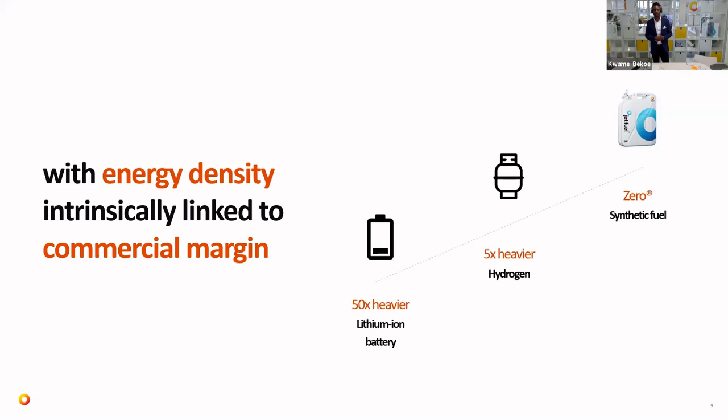One of the reasons why we believe synthetic fuels is the answer is because, number one, it's 100% fossil free. As I mentioned, these fuels are made simply from air and water, from hydrogen and carbon dioxide. So you've got unlimited scale - you essentially have free and abundant feedstock available, unlike biofuels, which are limited to the amount of land and water resource.

What is very key is energy independence. We say this because at the moment, if you look at geopolitics, we have about 22 countries producing about 90% of the world's energy in the form of liquid fuels or fossil fuels. When it comes to the key feedstock of this synthetic fuel, which is renewable power, every country has some form of renewable power, be it wind, solar, hydro, or geothermal. We believe that moving forward, this can actually be a form of energy independence for nations.

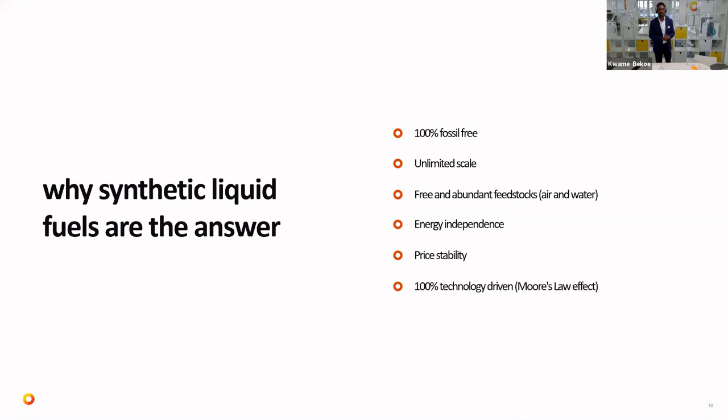This is an industrial process. We're essentially taking something that happens in nature, photosynthesis, and putting it in a factory by absorbing carbon dioxide using, for example, renewable energy like solar, air, and water, to produce a fuel. So essentially, it's an industrial process which you can optimize and continue to bring down the cost. I think one of the key arguments against the fuel we produce is the high cost of energy that it requires, but this is something we believe is coming down dramatically. If you go on to the next slide, I can demonstrate how we believe the future is going to look, because for us, this really is a Tesla moment in the synthetic fuel industry.

At the moment, the market is about $0.1 trillion biofuels, but that's going to hit a limitation once you're limited in the amount of land and water that can be used to produce these fuels. But we believe that as the price begins to scale back, in the next 25 to 27 years, synthetic fuels could be almost half of the fossil fuel market, which is a $5 trillion market.

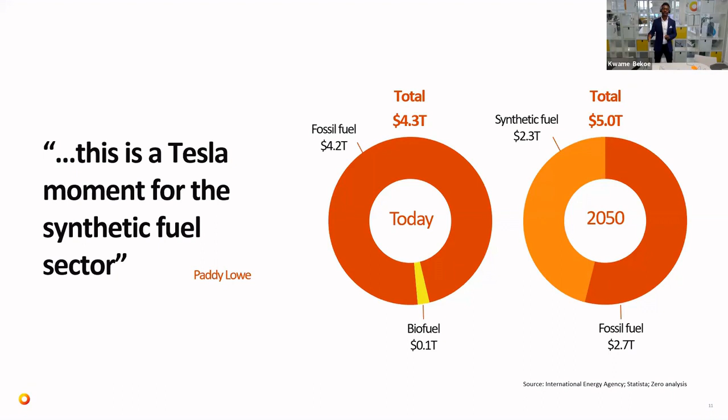On the next slide, we demonstrate how this price can come down significantly with time. That's primarily due to the reduction in renewable energy costs, the coming down of the cost of electrolyzers, which go into the production of green hydrogen, and the integration of all these products that make for a more efficient system.

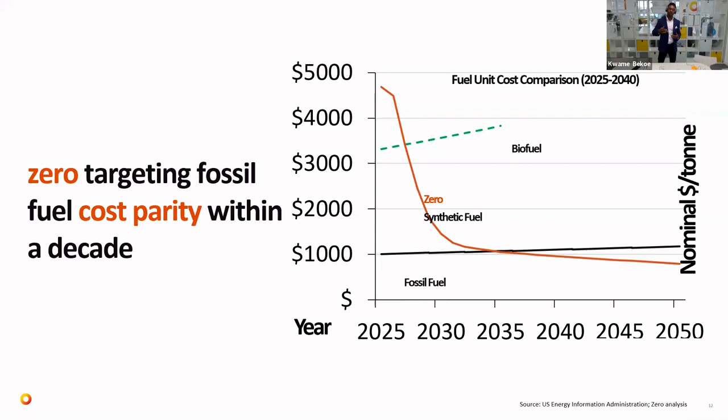So now, if we go on to the next slide, I'd like to talk a bit about the team, the company, and what makes Zero Petroleum and what drives us.

Going on to the next slide, I think one of the things that is really fundamental is the team. We're a startup founded by Paddy Lowe, who many of you interested in Formula One may know as a very popular British engineer, the former technical director for Mercedes, McLaren, and Williams Group. In fact, a quarter of our team come from the Formula One industry.

This drives the culture and the way we're tackling this problem, which is very much on a simulation basis, really modeling every part of the plant in terms of the production of the fuel and tracking all those metrics to further optimize production. Because one of the things we believe is that the winners in this field are those who can produce the most amount of fuel for a given amount of energy.

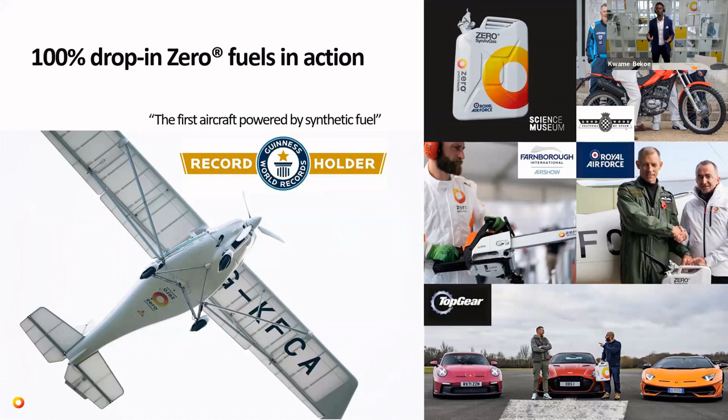So if we go on to the next slide, we'll highlight some of our achievements. In 2021, we were the first to test this fuel in an aircraft, receiving a Guinness World Record. We've gone on from there to test it in luxury cars, chainsaws, small jet engines, and motorbikes. Essentially what we're trying to demonstrate is a drop-in solution that requires no modification to the engines or the assets it's powering.

Now, on the next slide, I'll touch on the crucial element, which is how we actually produce the fuel. As I mentioned, air and water come in. We capture the carbon using a process called direct air carbon capture. This process is maturing quite dramatically. At the moment, we're also supplementing the carbon dioxide with biogenic sources of carbon dioxide.

On the green hydrogen side, we use electrolysis to produce the hydrogen elements. The hydrogen and the carbon dioxide together form a syngas, which goes into our version of Fischer-Tropsch, essentially a catalytic process that produces different types of hydrocarbons. So we've got gasoline, jet fuel, and on the heavy ends, diesel. One key thing to take away from this slide is that the production of the hydrogen, the energy molecule, consumes about 95% of the energy of this process.

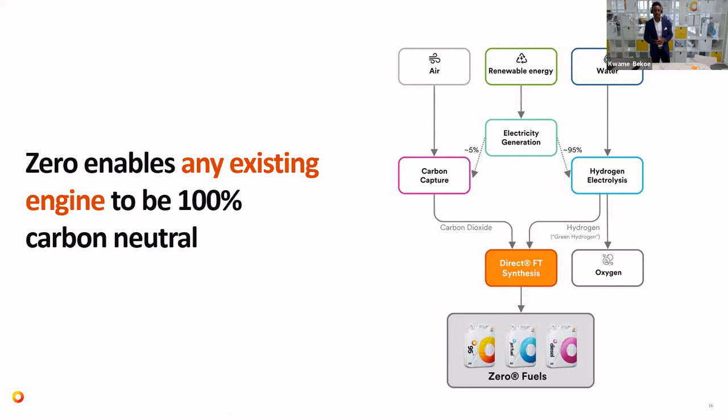So we can go on to the next slide, just a couple more to go. As I mentioned, these are drop-in fuels which go directly into the assets and internal combustion engines. The gasoline has the high octane levels required for the engines, and the jet fuel also has the aromatics necessary for all the elastomers in the engine. So it's a true drop-in fuel that requires no blend with fossil-based fuels.

On the next slide, please.

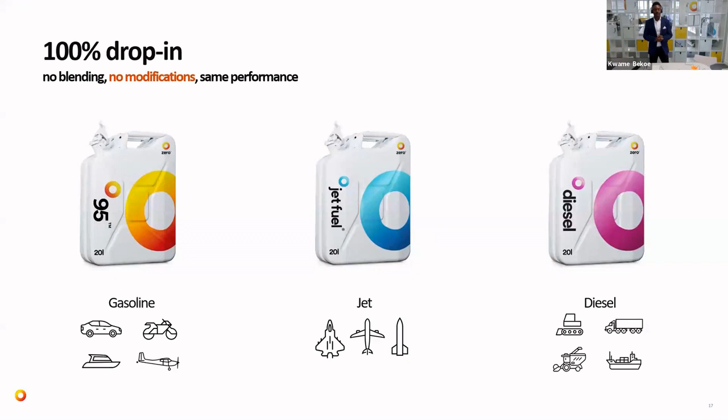What I'd like to do is just show a couple minutes video to highlight some of the achievements of the company. So thank you very much. Thanks.

Thank you, Kwame. We have a couple of questions you may want to take. The first one is coming from me. What is the time to market? I noticed you've suggested that by 2050, 50% of the market will be synthetic fuels. But when could we actually start seeing this? Or how quickly can we start seeing this being delivered to the average person?

Thank you for the question. So essentially, we are looking to go to commercialization in the next 2 years, and it's going to be a gradual scale-up process, as you can imagine. It's something we've tested and demonstrated over the past few months and years. We've signed strategic partnerships with a couple of airlines and OEMs in the aviation space, but also in the automotive space. Right now, we're working towards certification of the fuel, working to get a consistent mix. And then from there, it's really commercialization from 2024, 2025.

Thank you so much. We've got a number of questions coming in from the webinar attendees. I'm going to start off with one from Thomas Lancaster, and I'll try to read it verbatim. Is it not misleading for combustion alternatives to compare against hydrogen and batteries based just on energy density? Efficiency of energy use via an electric powertrain versus ICE is also a key factor.

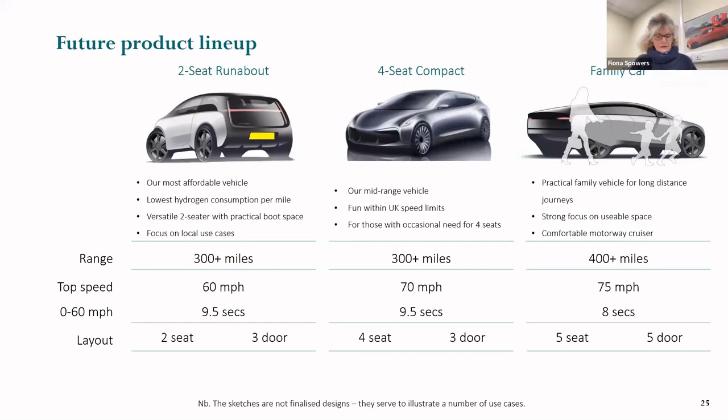Now, you may be asking, because this is what the government says all the time, and everybody you hear about hydrogen, they say hydrogen's just for the big stuff, and batteries will cope with all the small stuff, so we don't need anything but batteries for passenger vehicles. Well, I can tell you we do an immense amount of talking to the general public, and the number of people who come up to us and say, I'm just waiting for one of your cars, because batteries are not going to do it for me, is incredible. So we have a long waiting list of people interested in this.

But I wanted to make a technical point, which is that it's not a question of size. It really isn't. You could have a battery truck, no problem, if you only needed to do 50 miles a day, and you could refuel or recharge it overnight. It's not a question of size. It's a question of range, uptime, utilization, regular or not regular duty cycles, and refueling.

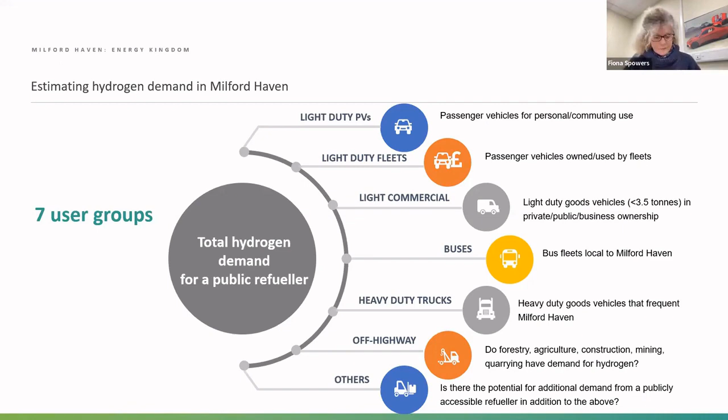Just to let you know, Milford Haven has a population of about 14,700, and we did a street-by-street analysis of the housing stock. In Milford Haven, the availability of off-street parking was there for 63% of all the housing stock, but 37% had no off-street parking, which we are taking as a proxy for difficulty charging. It's very difficult to charge your battery car overnight if you don't have off-street parking. In fact, the UK average is 39% of the housing stock will never have access to overnight charging. I can envisage if the only zero emission option is a battery electric car, you will have fights for the lamppost on your street if you live on a terrace, in a street of terraced houses. So we took half of that, 19%, as the percentage that might need a hydrogen version of a zero emission car to work out the full scale demand.

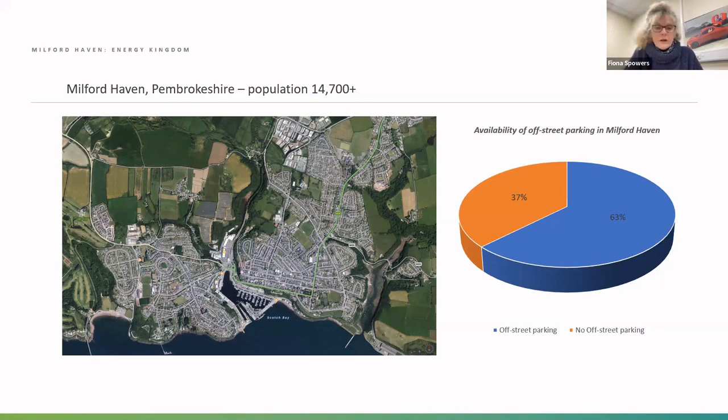On the basis - and this is really the Milford Haven case - going bus by bus, how many cars enter the town on a daily basis, how many are in light vehicles, light duty fleets, what we got in emergency services vehicles like ambulances, etc. We worked out, as you can see, there are kilos for each of those. What's interesting is that when you look at it, 580 kilos altogether for passenger vehicles, it more than equates the heavy duty trucks at 450.

So you end up with quite a heavy demand of roughly 1.7 tons, that's 1,770 kilos a day of hydrogen needed.

Now you're going to ask, where is this hydrogen coming from? At the moment it's largely grey hydrogen, just as battery electric cars, if charging from the grid, aren't charging from green electricity only.

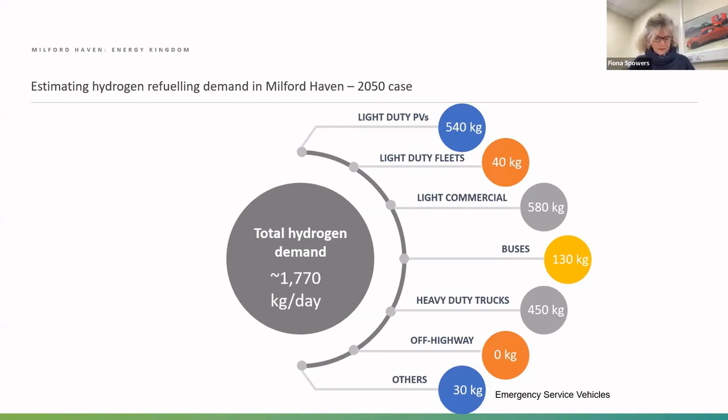I want to show you the next slide, please. That hydrogen infrastructure, which is really thin on the ground, by the way, isn't the end of the world.

There are all sorts of transient options. So the big picture on the right, the Motive Fuels Tyseley site, is the state of the art, offering 1,200 kilos a day, and it's fueling buses. It's a big commitment in Birmingham.

But next to it is a sort of small container-based solution, with the hydrogen transported to site, offering 450 kilos a day. So there are transient things.

And then next to that, this Octopus refueler, which is delivered by NanoSun, is a container that's just shipped in, filled up, and then replaced. So that can sit in the corner of a car park with no trouble.

So in terms of transition, there are examples out there, but ultimately I think we want to see hydrogen on a pump in a forecourt.

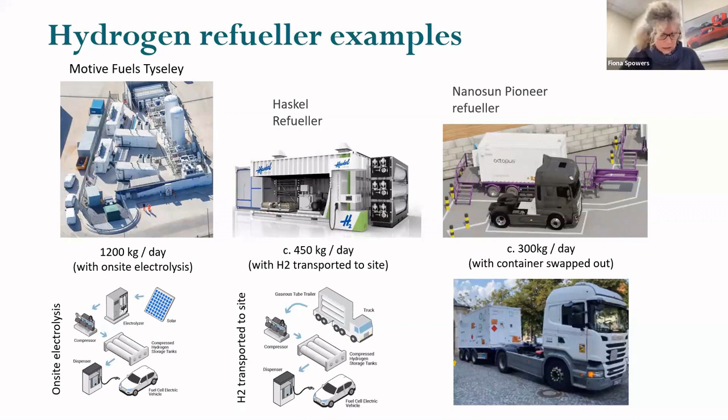And last slide, please. We see the local authorities as the key enablers to this transition. So we talked to a great many of them, and we are in dialogue with authorities who are already running battery electric vehicles in their fleets, but they're looking for alternatives for other use cases, the ones that battery electric vehicles can't meet satisfactorily.

So constant uptime, range. Monmouthshire County Council has a catchment of 270 square miles, and that is a lot to look after, and they need alternatives for some of the local authority needs. They also have declared climate emergencies, and they're taking that very seriously.

And they have a duty of care to enable the community at large to decarbonise. And I know this is fraught with anxiety for councils. They really care a lot about it and are trying to do the right thing.

But they're in a position, in our view, to encourage infrastructure development, though they're not required in this case to subsidise it. The companies are out there waiting to come in and put the refuelers in. If planning permission and other things can be helped or encouraged, I think it will make a huge difference.

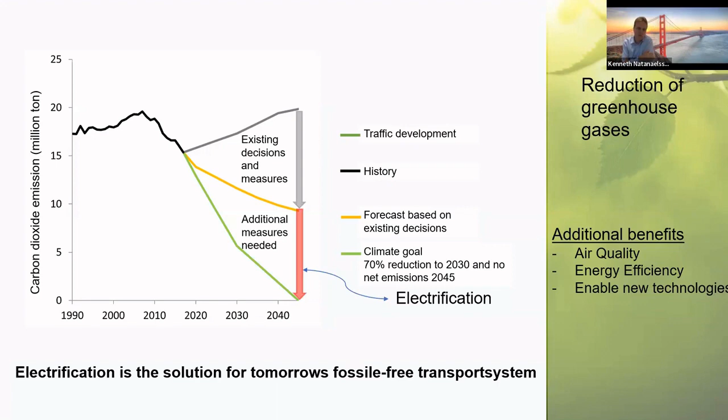Our goals at 2045, that is zero emission. We see that that's actually where the electrification of the road transport system will have the most impact. So we see a need to electrify the transports is really high, that's why we are working with it. Next slide, please.

You have listened to two great speakers here that have golden solutions for this, but we as a road administration think we will probably need a lot of tools to actually get to these goals. If we are going to reduce our carbon footprint to zero with the domestic transport system, we need to use a palette of activities. For example, we have to increase the efficiency in the transport system - we are working with longer and heavier transports.

We are working with biofuels, and of course with static charging and also dynamic charging, that is electrical roads, and hydrogen and other solutions. We are also looking at battery swapping and vehicle to grid, and how we can use all these kinds of tools to actually become carbon free. Next slide, please.

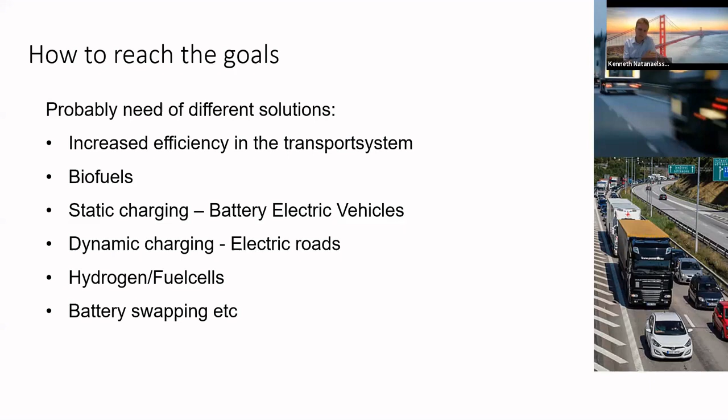Our strategy is that we see static charging will be the backbone within our system. So we have to work with that, and also with hydrogen, especially for heavy transport. We see, for example, the new AFIR directive in Europe that we will implement, because it's a directive, so we have to do it.

We are also looking at ERS, electrical road systems, but we are currently looking into it - how will this be a potential solution? We are doing some activities there, so during the next year we will know more about this.

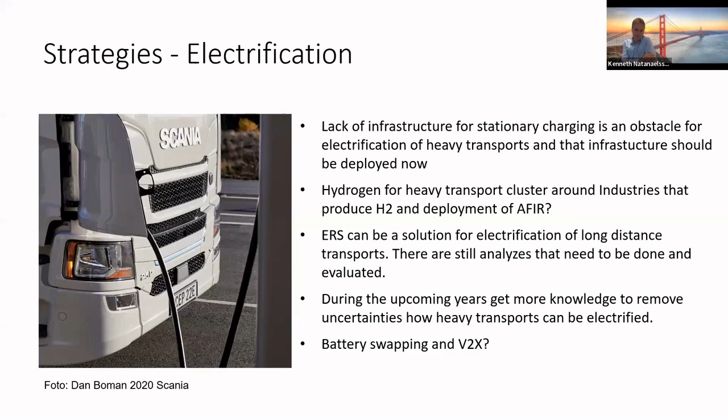So electrical road system, what is it? It contains different things, but you can divide them into four parts. First, you have the main electrical grid - for example, in Sweden we don't have so many local grids, but a kind of central grid. We also have to build a grid along the road that distributes the power to the vehicles, and that's the transformation part, which is actually what the electrical road does. We have different techniques for that.

Then we also have to integrate it within the road infrastructure. For example, if you have some techniques, you also have to have road barriers for traffic safety, and you might have to have monitoring systems, traffic management systems, and so on. So you have to work with the road infrastructure too.

In Sweden, we have actually demonstrated 4 solutions on public roads. We started with the conductive system in Sandviken - that is the catenary system above, where you take the power from above, like a rail system almost. We ran that for 4 years, between 2016 and 2020.

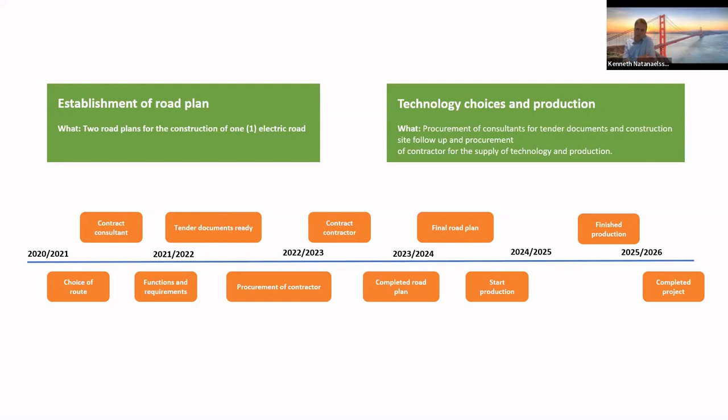We had a technically neutral procurement process that we launched about a year ago, but we've actually stopped it right now. We will go back and look into what kind of requirements we put in place, because the cost was too high for this system, and we didn't have the funding to go on with it.

So what are we doing right now? The current major activities at Swedish Transport Administration regarding electrification: we're working with a program for deployment of charging and hydrogen infrastructure. Together with another authority, we'll deliver an assignment to the government within approximately a month. As mentioned, with the permanent pilot, we're analyzing how to build it more cost-effectively, which will take a while. We're also working on a suggestion for a deployment plan for ERS, describing the consequences, costs and benefits, so the government gets documents to make a decision. We continuously follow up on electrification in society and the transport system to see what more we need to do to become more effective.

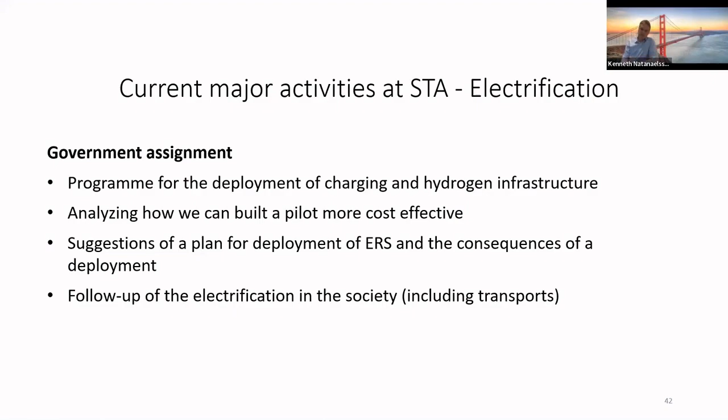I'll stop there, I think we're on schedule. Thank you, Kenneth, really very interesting.

A couple of questions. First from me: what vehicles are able to utilize these ERS systems in your trials? Do you have manufacturing agreements to put vehicles on these trials, or how do you accommodate it? No, actually we are buying knowledge from the providers of these different kinds of systems, so they are putting the vehicles on the test road, so to speak.

It has mostly been trucks and buses, but I know there are some light vehicles also. So is it fair to say that most of the pilots you're doing at the moment are more specific to freight movement than passenger cars? Our first challenges were for heavy trucks, so yes it has been that focus, but we don't see that it's necessarily just heavy trucks in the future. Of course it depends on the technique - for example, a catenary system is not so suitable for light vehicles. No, absolutely, that's a good point.

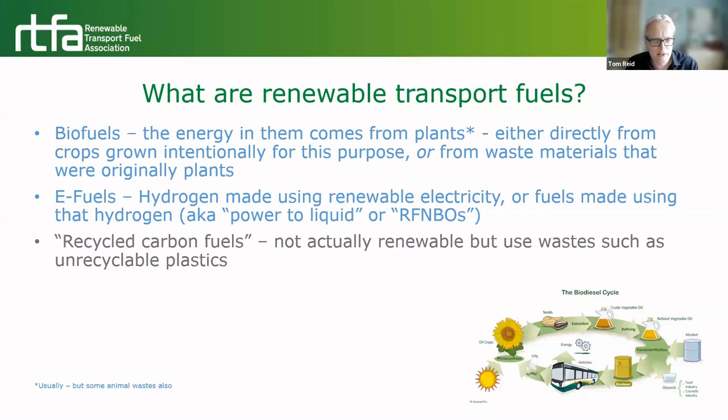Rather it's municipal solid waste, which is a mixture of waste plastic and food waste and cardboard and so on. So it's where you have a mixed waste that's difficult to treat. You could potentially turn all of that waste into renewable fuels. So the food waste, cardboard fraction would be a biofuel, and the bit from the waste plastics would be a recycled carbon fuel. So if we move on to the next slide, please.

I think the thing to bear in mind is that they do deliver significant carbon savings. Not 100%, but getting there. The other good thing about them is that they can be mostly used in existing vehicles. There's a lot of discussion about what future technologies will be along, and I personally believe they will be, and we'll have the choice to buy hydrogen or electric or other forms of vehicle in the future. But if you're trying to buy an electric 44-ton lorry at the moment, your choices are quite limited, whereas you could run a 44-tonner on renewable fuels right now. In a minute, I'll come on to a couple of people who are already doing that.

Something you may or may not know is that the biofuels particularly are already out there, already being produced, already being consumed. When you fill up at a petrol station, if you buy diesel, you'll see it says B7 on the pump handle. That means it has up to 7% biodiesel in it. Similarly, petrol has up to 10% ethanol, which is why it's labelled E10.

All this has been created by legislation by the UK government. It's something called the Renewable Transport Fuels Obligation Order, the RTFO. And that requires the big petrol and diesel suppliers to supply a portion of their product from renewables.

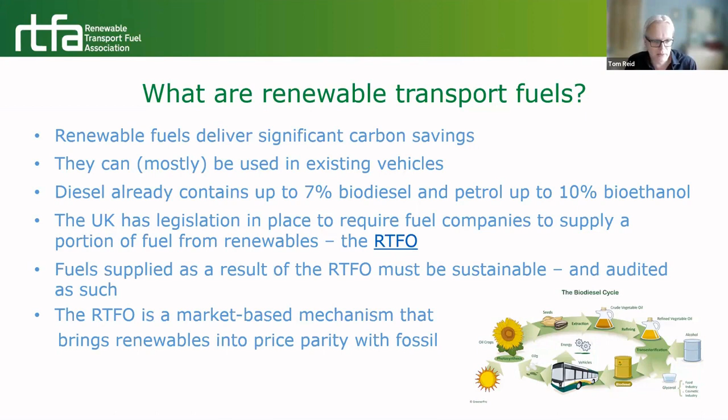The more or less is added there because it's a market-based mechanism, prices go up and down. So certain renewable fuels at certain times have been in price parity with fossil. It depends which renewable fuels you're buying and when you're buying them, because it does fluctuate. So if we move to the next slide, please.

So again, still dwelling on the credentials of these fuels. Greenhouse gas savings are measured using something called life cycle analysis, which is essentially a comparative tool. We know the carbon emissions from burning fossil diesel are 94 grams of CO2 equivalent per megajoule. The GHG performance of any renewable fuel supplied in the UK has to be measured against that, and then it's given as a carbon intensity or a percent saving.

This does take into account growing and harvesting of the crop, if it is crop-based, collection and processing of raw materials, conversion into fuels, and onward distribution. So all of the energy used, whether moving materials around or the conversion processes at the factory, all of that has to be taken into account.

And I would argue, given that this is something I've done for a living, calculating life cycle analysis of almost any product, you'd be very lucky to ever have something that was 100% carbon neutral, unless the entire supply chain was also carbon neutral, and more than likely you'd need some form of carbon sequestration alongside, because there are always going to be some fugitive emissions somewhere along the supply chain, somebody using a diesel lorry or ordinary electricity for their processing.

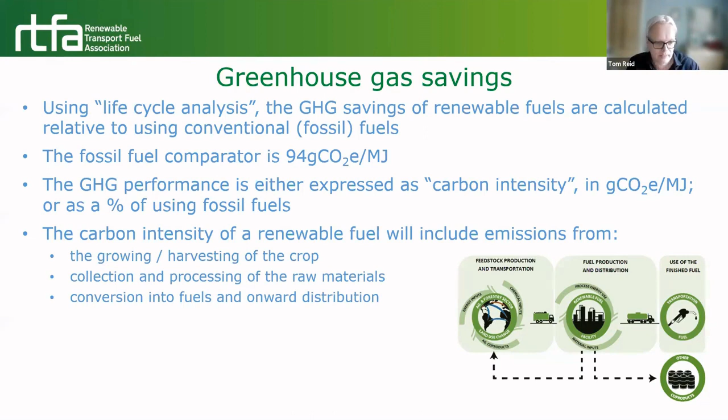Fossil fuels have been used for a good reason. They are comparatively cheap and abundant compared to all the other alternatives. They're easy to use, easy to distribute. If there were other, better, easier solutions than fossil fuels, we'd have started using them ages ago. They're there, and they've become essential for our way of life. I'm not particularly defending fossil fuels - I'd quite like to see the back of them - but nevertheless, the reason we use them is they are so convenient.

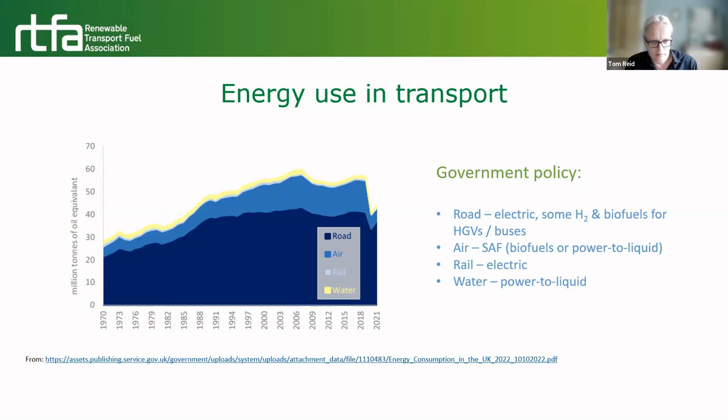If we move to the next slide please. So what I'm trying to say really is that renewable fuels are the near future. It's very interesting hearing the other speakers today - I think we will see all of those things come along in due course. But if you want to decarbonise today, and there's no better time to do it, your options are much more limited, which is where renewable fuels come in - you can deliver real carbon savings measured by the things I've mentioned previously.

Renewable methane is chemically identical to natural gas, but it's made largely at anaerobic digesters, which take in materials such as sewage, food waste, or farm waste like manure, essentially putrefying that material to produce a mixture of methane and carbon dioxide. The methane is separated and put into the national gas grid, and then you can take an equivalent amount out somewhere else to run your lorry on it. So that's what John Lewis do.

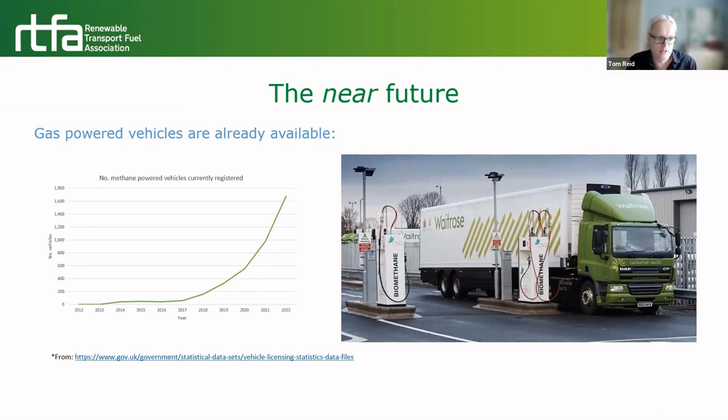So those 44 tonners will be running on quite long shifts, using renewable methane with equivalent carbon savings of around 80% compared to fossil fuels. So my argument is yes, electric vehicles or hydrogen vehicles will be along in the future, it's only a matter of time. But if you feel you haven't got time and want to do this straight away, these vehicles can be bought right now and fueled right now with these fuels. So if we go on to the next slide, please.

So when you think of decarbonisation and environmentalism, probably the first two things that jump into your mind would be McDonald's and Formula One. But nevertheless, again, some 44 tonners here. McDonald's run their lorries on chip fat. They have a company with the contract to collect used cooking oil from their restaurants, which is converted into biodiesel, and they run their lorries on that.

Biodiesel is a particular type of fuel, made in the UK usually from waste cooking oil from chip shops and restaurants. On the right there, you see the DHL lorries, running on a different form of diesel replacement called HVO, hydrotreated vegetable oil. That's a bit more expensive than regular biodiesel but slightly easier to use in terms of things like changing filters on the lorry. You can use HVO as a direct substitute for diesel, stick it straight in any diesel vehicle, and it will run without any problems at all.

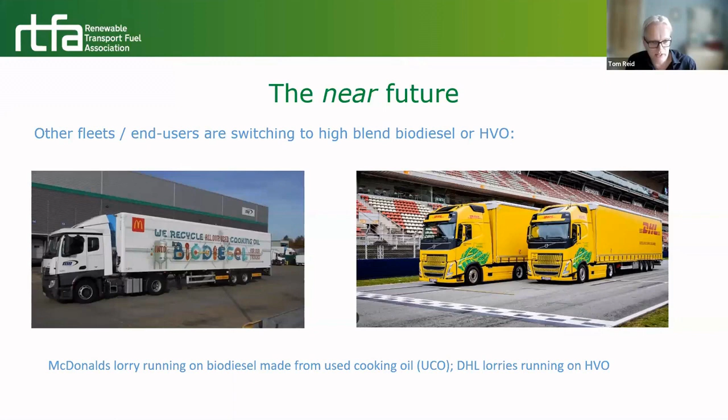So if we move to what I think is my last slide, please. A little bit just about the RTFA. We've got about 50 members, covering a variety of different companies. We've got comprehensive membership of every producer of renewable fuel in the UK for the transport sector.

We've also got a lot of other companies who either ship renewable fuels in from elsewhere or manufacture them elsewhere and wish to sell into the UK market. We've also got quite a few members hoping to develop plants in the future. A big part of our membership are companies hoping to develop plants that will make renewable aviation fuel, still all at the project stage by and large, most hoping to turn municipal waste into jet fuel. They'll also produce diesel alongside the jet fuel, because you don't only make jet fuel via that process.